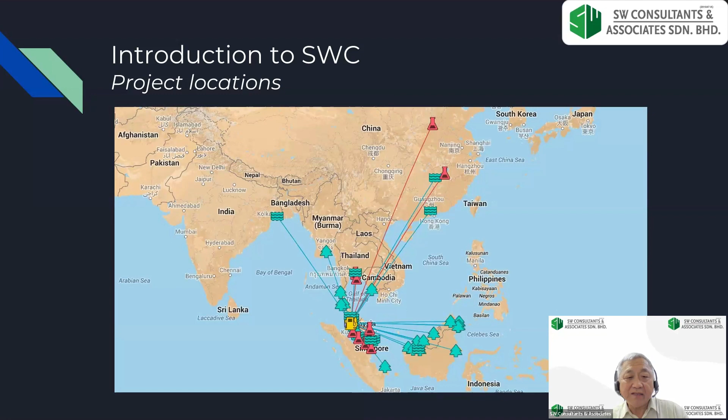Like in Calcutta, we did a quite big water treatment plant. The joint venture partner was Haldia Water Treatment Plant, joint venture with part of - I can't remember - Haldia is one of the bigger groups in India. They own the plant, but our working partner was under Ranhill Utilities.

Then there are some others that we have done. The so-called infamous project is the wastewater plant we did for Lynas Advanced Material in Gebeng, Kuantan. Till today they are still allowed to run it, so they still have to find a long-term solution for the solid waste disposal. We were looking after the liquid waste disposal, not so much the solid waste.

The radioactive part was handled by the client themselves. We were doing mostly the scheduled waste, the BOD, COD stuff.

Another project we did was the small palm oil mill in Ranau, Sabah. This was a project where the DOE imposed a condition of zero discharge. So in the end, we had to do the disposal using compost that consumed all the effluent.

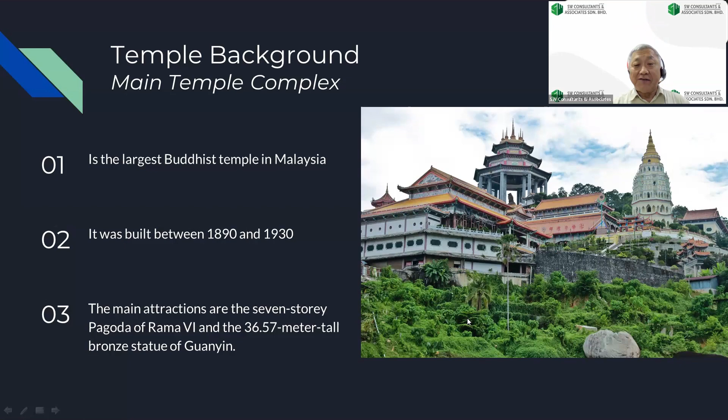It was in, I think, 2008 that Mr. Jimmy Koo of Jimmy Koo Consulting and Associates approached us to see whether we could take over the steel structure that is on the roof. He was the consultant for the superstructure, the concrete part of it, including I think the foundation and all that.

At that particular time, the base of the structure was completed. The column was coming up at the time, and I think the committee had approached him with two designs actually. The first design was in concrete, and it was way too heavy for the existing column and foundation to take.

So the committee went back again to China, and this time it was the School of Architecture in Zhejiang University, and they put up another design in steel. Even that came back too heavy - it was over 4,000 tons of steel on the roof, and I think Jimmy Koo felt that it was way too heavy for the column standing so high up.

So the committee actually at first talked to us to see whether we can do some kind of value engineering to reduce the total weight of the structure, but it will still be in steel rather than concrete. After studying it, we said okay, we can check through the design and make some proposal. But after we came back to them at the end of 2008, they said okay.

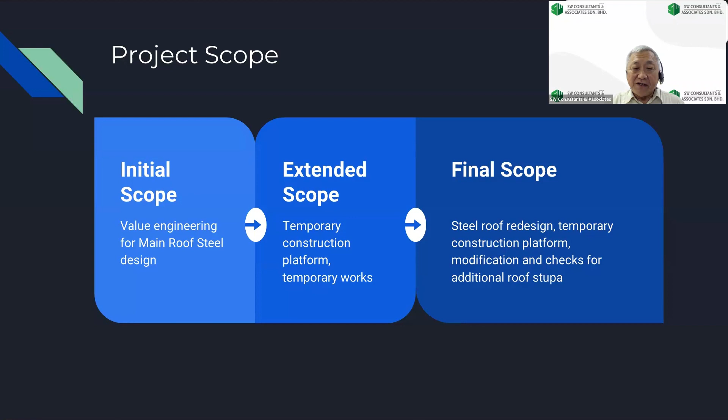Okay, let's have a look at the overall design of the thing, the design overview. As you can see, the structure is quite high. The Kuan Yin statue itself, plus the foot thing, is more than 100 feet high, and then there are various stages of the roof.

The roof itself - we had 16 columns, but they are all in a cascading form where not all the columns are supporting the roof. So there will be a stage where we have to do some transfer from the upper part of the roof to transmit the load right down to the column and then the base of the structure.

Overall, I think this drawing is the actual one that we started off with. But as you can see later, as we progressed, the design itself has changed, kept on changing.

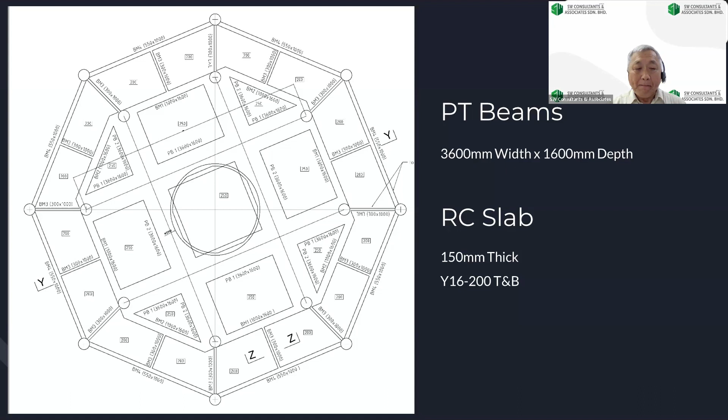Yeah, this is the post-tension beam. I think the post-tensioning was done by VSL. This is the walkway around the base of the pavilion.

Let's look at the challenges that we face. Bearing in mind that...

The RC structure was too heavy, so that's why we came in to change it into steel. But even changing it to steel, we still have to comply with the architecture that was previously determined, like the depth of the beam, the width of the beam. From the structural point of view, the beams themselves need not be that deep or big, but because we wanted the impact from the architectural point of view, we end up having such a big beam.

The beams are all prefabricated box girders in steel. And we have to imagine that some of the beams themselves are some 26 meters and weigh maybe 20-30 tons. But the lifting capacity of the crane we had on site was only 5 tons. So the biggest challenge was, how am I going to put up a 30-ton beam at that height when all I have is a 5-ton crane? I think that was one of the biggest challenges.

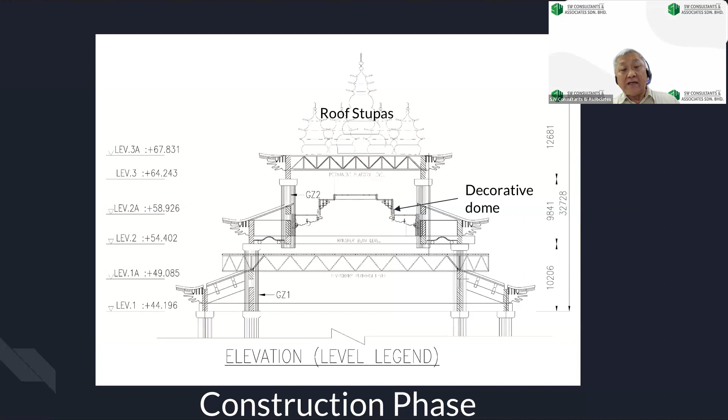So at the end, who is going to do that platform? So we ended up having to design the platform ourselves. I think later, under Lim Sin Chun, you will be able to see the detail that we did for the temporary platform. Okay, this is the temporary platform that allows us to reach upward to do the work above that level.

And the transfer beam - after the last column, the inner column only goes that far, and there's another level at the 54 to 64 level that needs to be seated upon, but there is no column underneath. So there's a transfer here - the introduction of another prefab box girder that will do the transfer from the higher level down to the foundation.

And then there's another part in which the permanent platform level is actually what we call the roof. The idea was how are we going to sit the stupa, the crown of the pavilion, which itself was quite heavy, weighing probably tens of tons. At the same time, we have to think about how to support the decorative dome that occurs below the roof.

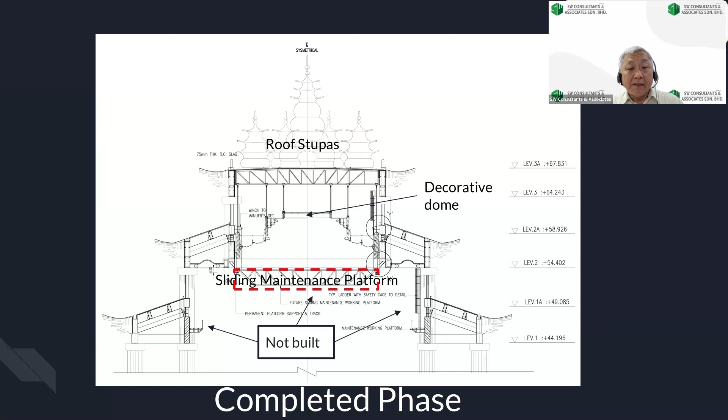Originally, one of the requests from the client was that during maintenance, eventually after the whole thing is completed, how are we going to do maintenance on the underside of the decorative dome? Basically repainting and maintenance, because the whole thing is in steel, so you need touch-up work throughout the lifespan of the structure.

So we came up with a sliding platform, but unfortunately this was never built, because in the end the chief abbot said it doesn't tie in with his architecture, and we were not allowed to install this sliding platform. Although the I-beams, the traveling girder, was installed, the platform itself was not installed due to his objection. He said it looks too much like a factory. So until today, this thing is not built.

So, the transfer beam—we have talked about the transfer beam. Permanent platform, okay. That's a plan view of the pavilion. We have the outer ring and then the inner ring. The inner ring is where it's supported on the transfer beam.

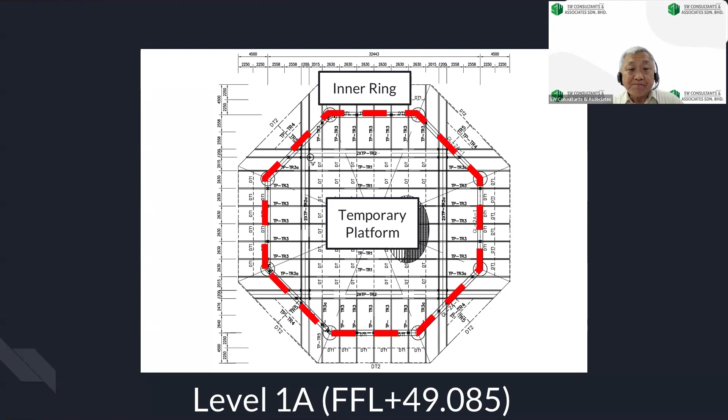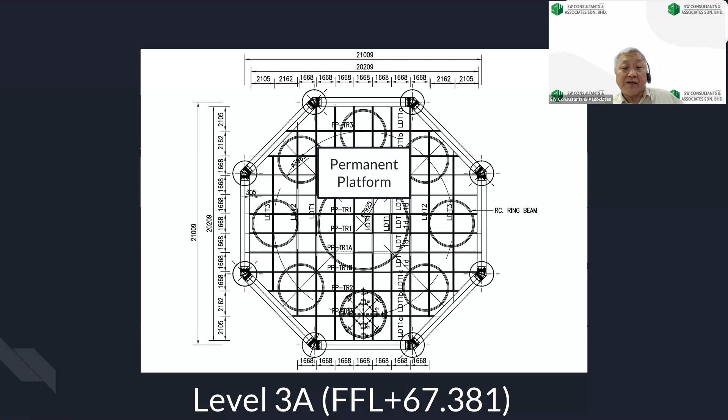The decorative dome, and then the small circle and the big circle is the final stupa that is representative of the temple that you see today, the symbol of Buddhism.

Okay, that's it. But now we will go through the 3D—I'll pass that representation to Engineer Lim Sing Chun to present it to you.

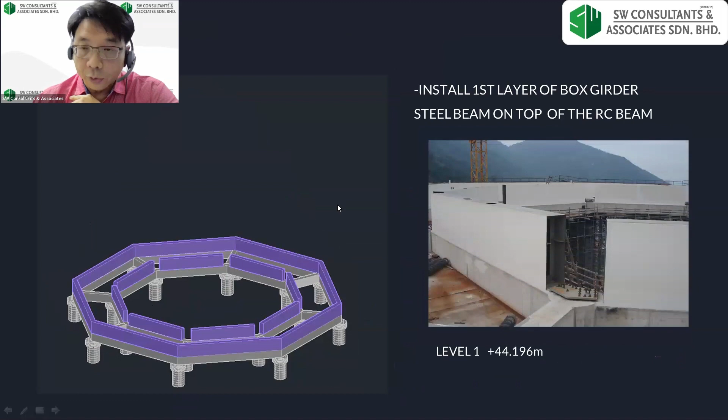I will go through the sequence of how the steel structural elements are installed step by step. This is the completed RC beam level, where the steel structural will start from. The first element to be installed is the box girder beam. All the steel beams will install on top of the RC beam as shown. This is another picture showing the builder installing the steel beam segmentally on top of the RC perimeter.

Now you may have a question: why do we need to stack a steel beam on top of the RC beam in the same span? In fact, the RC beam itself is already 1.2 meter deep, and the steel beam itself is 2.4 meter deep. The answer is to facilitate the installation work of the decorative cornice and dragon beard, because all the decorative features, as mentioned, are made from steel, and we just directly weld those decorative features to the steel beam.

The green elements shown are the dragon beard, to be installed at every corner of the beam. The light green elements shown are the decorative cornice. This picture shows the decorative cornice welded to the steel beam. This is another picture showing the dragon beard and decorative cornice completed in one span. This is a closer view, from which we can see the surface of the steel beam fully covered by the decorative features.

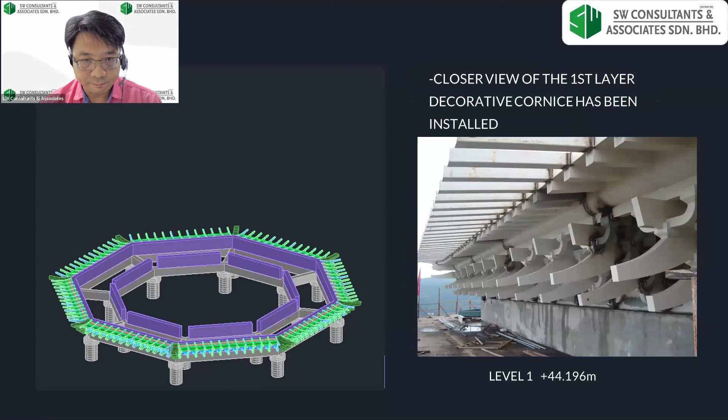Once the decorative features have been installed, subsequently artists from China will start painting the decorative cornice, because the painting work will take a few months to complete. In the next section, part 2, we will show the completed art painting work.

The next element to install is the prefabricated steel column. This is a cross-section view of the prefabricated columns. The reason we custom-made the column is mainly for ease of connecting the beam to the column at a 135-degree angle in plan view. This picture shows the sequence of the builder installing the column to the base plate.

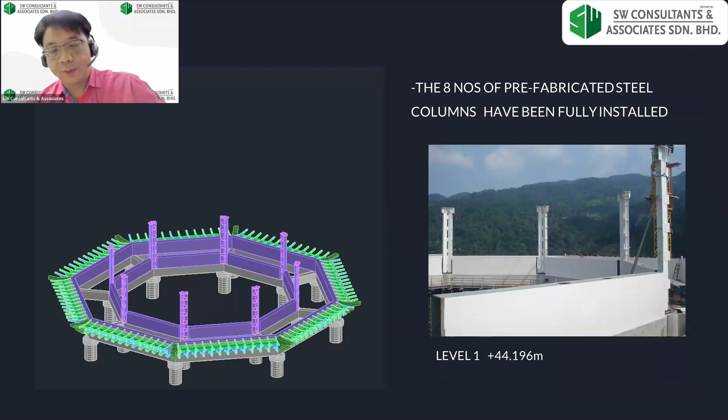When 8 columns have been installed, the following element to fit in is the rafter, between the column and the external perimeter beam, as shown.

The subsequent element to install is the column tie beam, shown in red color. This is another picture showing the builder installing the column tie beam.

The purlin, shown in magenta color, is the next element to install onto the rafter. This is a closer view of the purlin that has been installed to the rafter, showing the connection detail of the purlin onto the rafter.

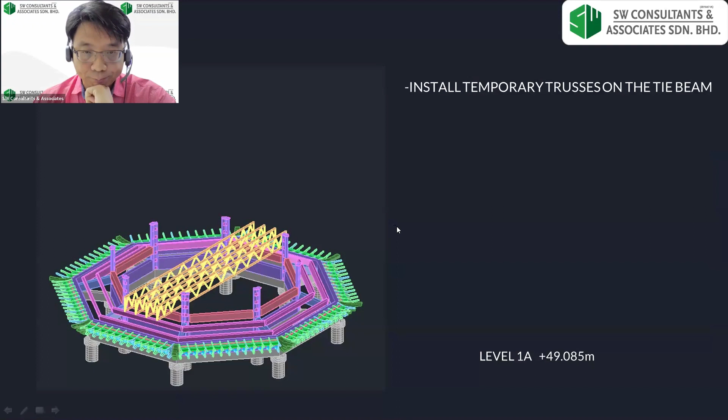After that, the next major element to install is the temporary truss onto the tie beam. This picture shows the builder installing the secondary truss to the main truss. This is another view of the secondary truss after installation.

This model shows that when all the temporary trusses are installed, they will cover about 40 meters by 40 meters. This is a bottom view of the temporary trusses.

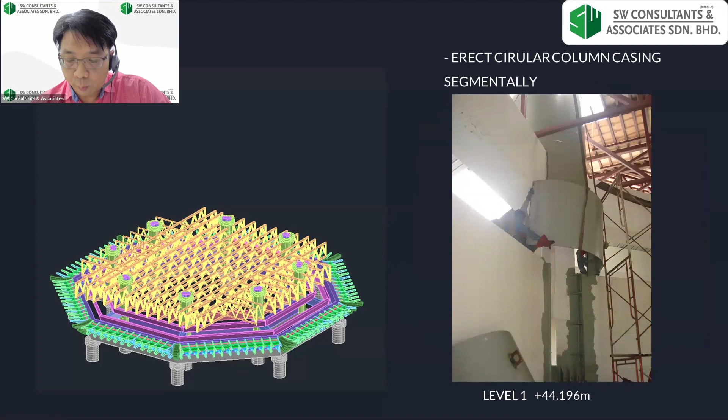During the installation of the trusses, the builder also has to erect the circular column casing segmentally, because the original column design is a circular column of 2.1 meter diameter with 20 mm thickness. Since we modified it to a prefab column, we need to cover it back with 4 mm thick circular casing to retain the original outlook.

This picture shows the circular casing has been completed. This is an internal view showing how the casing supports the prefab column.

When all the temporary trusses have been fully installed, the subsequent step is to install the hollow section floor joist on top, followed by laying the timber plank. This forms the temporary working platform for the builders.

This temporary platform is a significant structural element for this project. Without this platform, we are unable to proceed with the installation work for the following level. This is mainly due to the limitation of the tower crane, which has only 5 tons maximum lifting capacity. For elements exceeding 5 tons, it has to be broken down into a few pieces, lifted up to this platform to be assembled back. Once done, we are able to continue with the installation work.

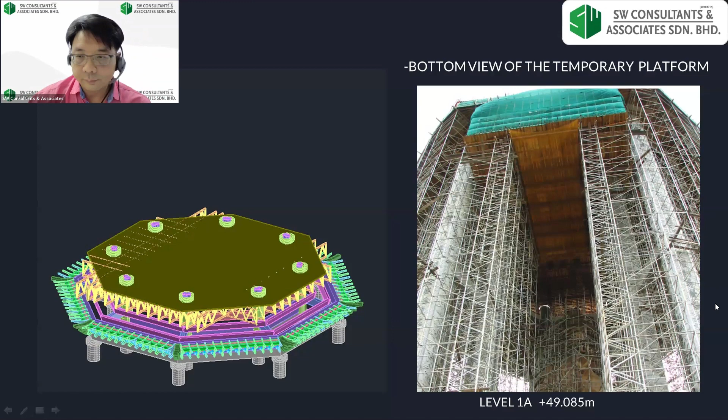Furthermore, based on the site situation, the scaffolding was unable to erect in the middle of the Kuan Yin statues. Hence, the temporary truss system is the best option for this project.

The next element installed is the second layer of box girder on top of the prefab column. There are 8 perimeter box girders to be installed in the second layer.

This video shows the second layer of box girder has been completed. Now they are starting to install the transfer beam.

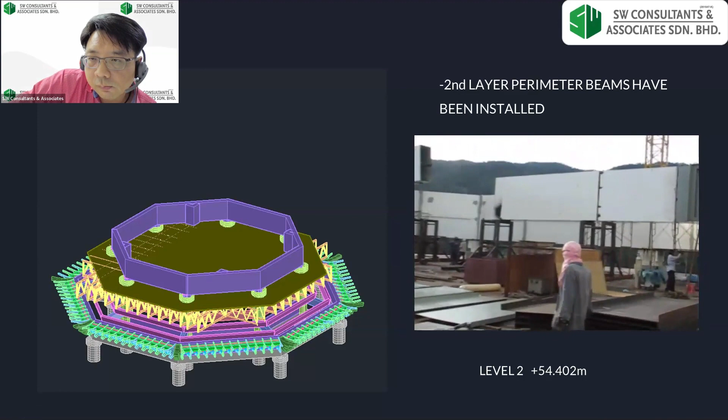The transfer beam is shown in pink color in this model, which is the next element to be installed.

This video shows the builder installing the transfer beam, jointed in 4 segments. From this video, we can also see that all the workers are working on the temporary working platform as mentioned just now.

During the installation of the transfer beam, at the same time they are starting to install the decorative cornice and the dragon beard on the second layer box girder beam.

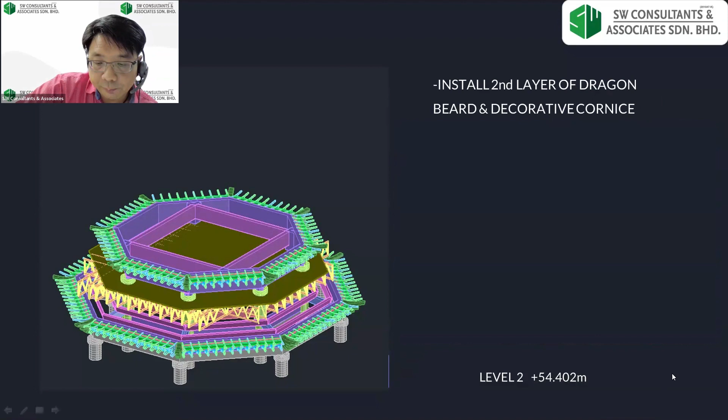The next element to install is the second layer of prefab column on the transfer beam.

After this, the following step is to install the rafter, which is the same procedure as level 1.

The next element to install is the tie beam and the purlins. The procedure is also the same as level 1.

For all the second layer of prefab columns, also required to be covered by the circular casing as well. From this picture, we can see that the right side casing has been completed and the left side column has left up the bottom segment to be installed.

The next interesting element to be installed is to assemble the decorative dome, or Chao Jing. The decorative dome is the prime decorative feature for this project. This picture shows the builder assembling 2 segments of the dome on the temporary working platform.

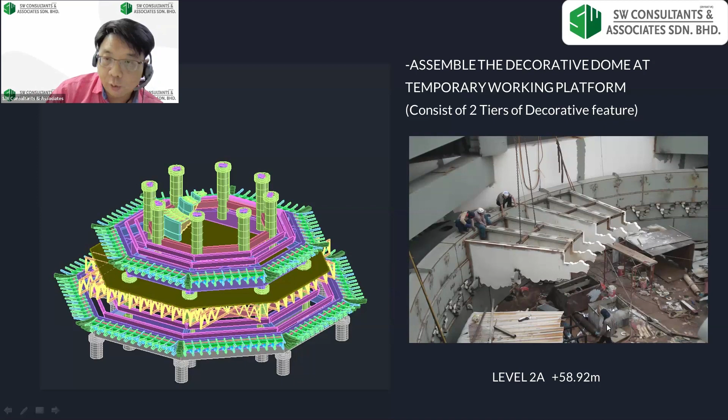Generally, the dome consists of 2 tiers of decorative features. The lower tier has 16 segments and the upper tier has 12 segments. This picture shows the builder assembling the 3rd segment of the lower tier.

This is a closer view showing the two tiers of the decorative dome, or Chaojing, that have been installed. Once the decorative dome has been assembled, the top view will look like this. This photo shows the worker covering the gap with the aluminum sheet.

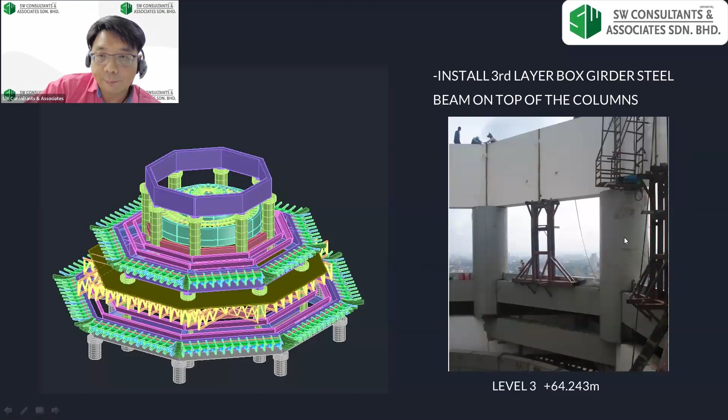The next element installed is the third layer of box girder onto the second layer of prefab columns. Once complete, the following step is to install the permanent truss to the steel beam.

This picture shows the permanent truss that has been fully installed. The permanent truss is another essential structural element. The truss is not only designed to support the 9 stupas on top, but also acts as a support system to hang the decorative dome below it.

The next step is to raise the decorative dome to the designated level and hang it onto this permanent truss with ties. This is a different view of the decorative dome being hung to the permanent truss. These trusses have at least 3 or 6 ties to hang the decorative dome.

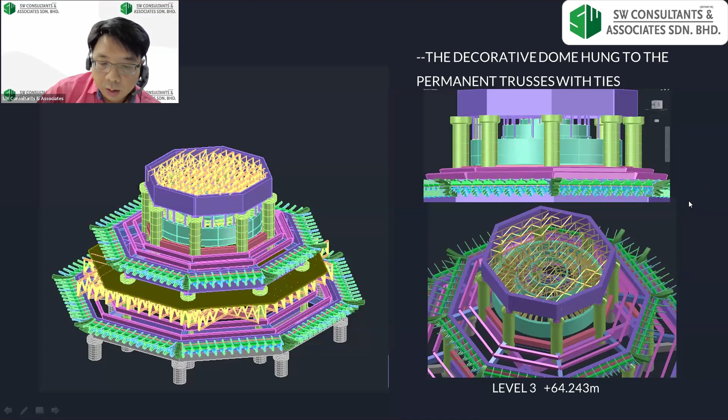This is the bottom view of the decorative dome. The picture shown here is the actual look of the decorative dome in the night scene.

The next elements to fit in are the decorative cornice and the dragon beard, welded to the third layer of steel beam. At the same time, they are also concreting the top floor.

The last element to be installed here is the 9 stupas. This picture shows the builder erecting the base of the main mini stupas. This photo shows 3 mini stupas that have been completed, and they are also starting to erect the base of the main stupas.

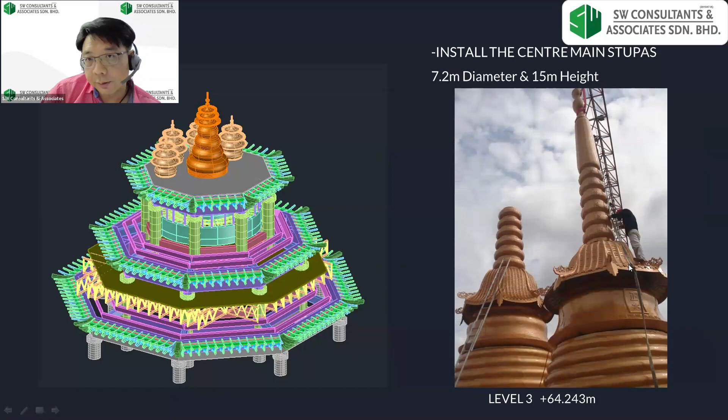The main stupa is double the size of the mini stupas. It is 7.2 meters in diameter and 15 meters in height. This photo shows all the stupas; one has been completed.

After this, the next step is to cover the 3 layers of roof. All roofs are designed as double roof, which is a lightweight concrete slab beneath it with roof tiles stacked on top.

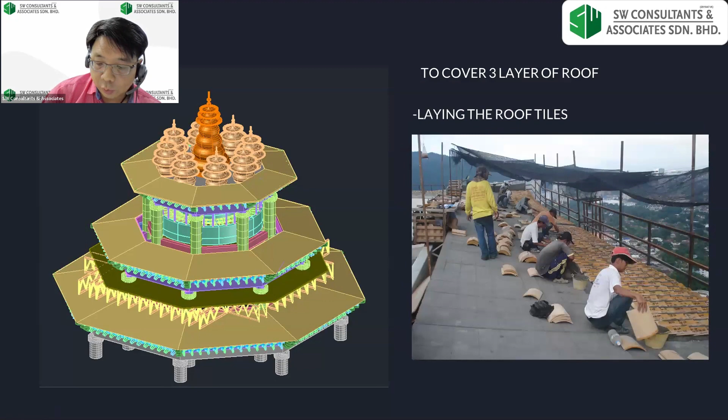This photo shows the builder preparing the slab soffit with nominal reinforcement. Then they start concreting the roof slab. After that, they start laying the roof tiles on top. This is the picture showing the completed roof work.

The final step is to dismantle the temporary working platform. All the temporary truss is to be dismantled and removed away. Once the temporary truss is fully removed, the whole steel structure has been completed.

The Guan Yin Statue Official Opening Ceremony was held in December 2009. This project was considered completed on time.

However, after the event of the ceremony, there was some extension work carried out because the client felt that the present stupa's height was not visible and also not in good proportion. Hence, all the stupas needed to be raised up by 3.5 meters.

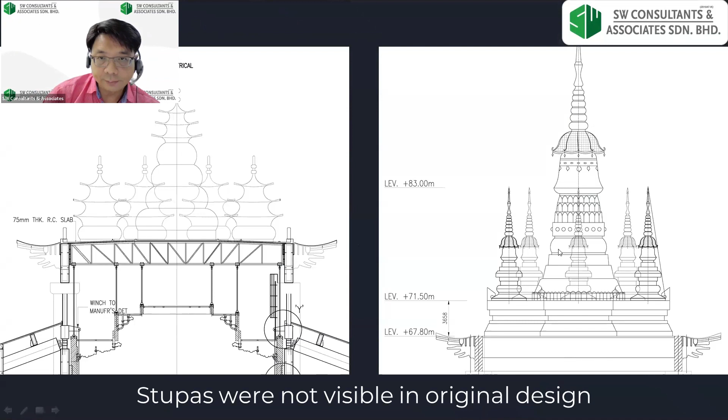From this drawing, you can see the left side is the original build and the right side is the modification. This is the raised up platform, 3.6 meters high.

Those are the drawings showing the original design, and this is the modification of the stupa's layout, including the tie-back truss at the corner. This is the section of the perimeter staging and also the tie-back truss. This is a modified base frame for all the stupas.

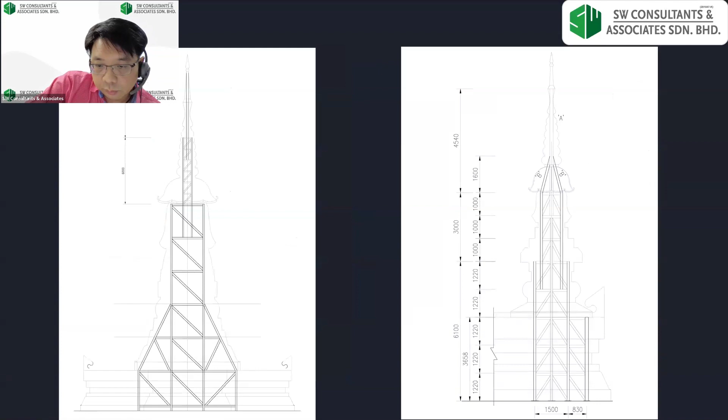This is the end of my slide. Before I end my presentation, I will run through the slides again very quickly to show how the structural elements build up in the 3D modeling.

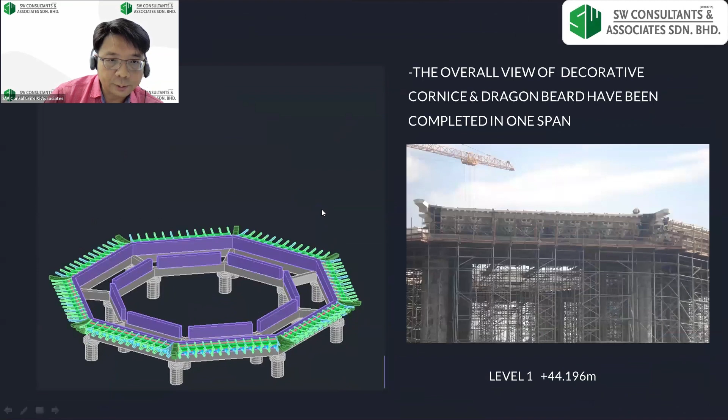Look at the 3D model showing the sequence of how the structural elements build up: from the temporary truss, platform, box girder, transfer beam, second layer of prefab column, casing, decorative dome, third layer of truss, then third layer of beam and truss, tie, and stupas.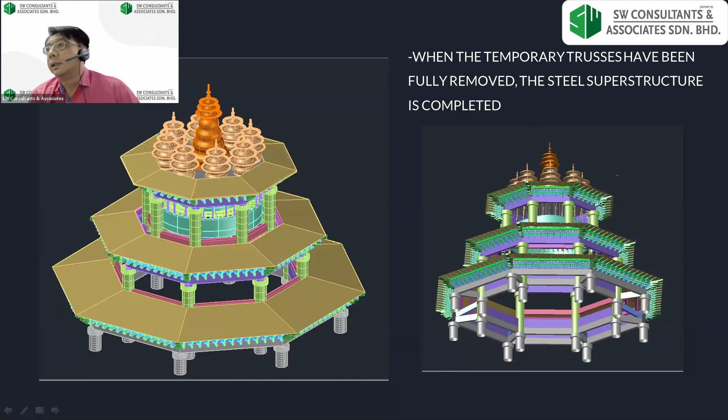Okay, that's all. Or you want to take it? Okay, there's a question here. Right.

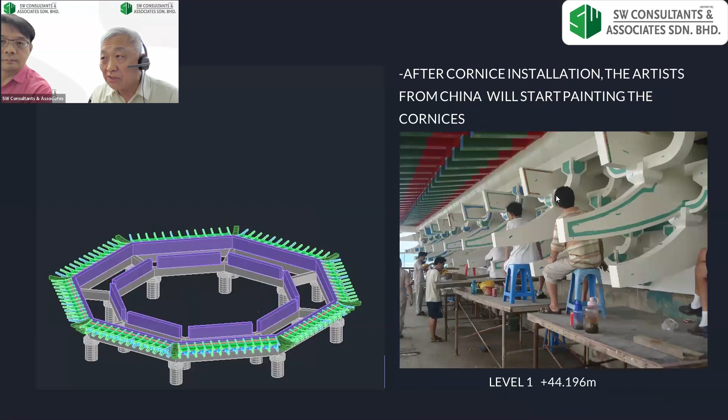This one I'm talking about, the hold down. Yes, oh, you are talking about the column. Okay, column, yeah, it's not the beam, this is a column. This column, you can see some of the hold down plates coming out of the concrete beam, right? That is installed during the concreting of the RC beam. The reason why this plate is installed first and not attached to the column is because it actually exceeded our 5 tons.

Our crane can only lift 5 tons, and this base plate we are using is about 25mm thick. They are quite heavy, over the 5 ton limit, so we decided it should be installed separately. We lift the base plate up, bolt it down to the hold-down bolt, and only later do we lift the prefabricated column and install and weld it on site onto the base plate. Is that answering your question?

Okay, so all this is prefabricated in the factory and assembled at the site piece by piece. Using steel columns and steel plate instead of concrete is to reduce the weight, isn't it?

Yeah, using steel was to reduce weight from the original design, which was much heavier. There were two options originally proposed in concrete, and the first version in steel was done by Zhejiang University, weighing about 4,000 over tons — that's the overall weight of the roof.

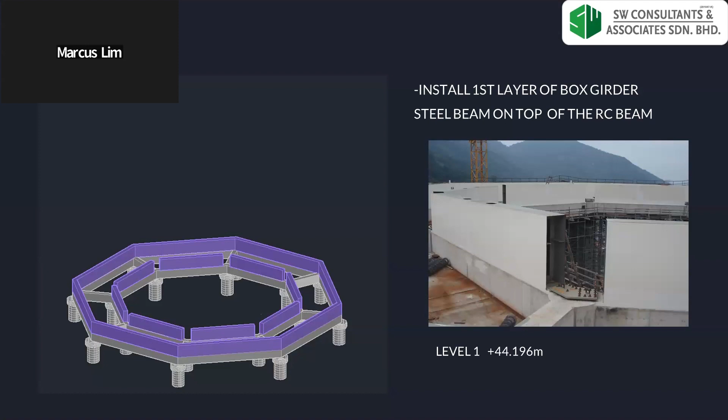If you are using a standard section, there is no section of this size. Even if we used an I section, it would have to be a prefabricated I section. But I think the main reason box girder was used is that when we went there, people had already decided to use box girder. But I can see one of the main reasons is to comply with the architectural design — when we welded all the decorative cornices, the dragon beard, and all that, it needed that kind of height to attach all these patterns. So structurally you could use any section, but architecturally the box girder seems able to fit all that. Also, since most decorative features are welded on one side, there's a lot of torsion involved, and the box girder is very good in terms of torsional rigidity. So after we fixed it, there is hardly any deformation because of the big size and big torsional capacity of the box girder. I hope that answers your question.

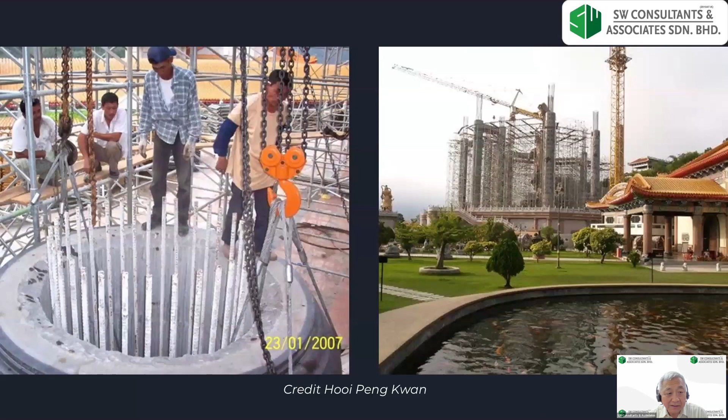This is the masonry casing used for the 16 columns. I think they all came from Guangdong, China. This shows how they erect the casing first with the reinforced concrete center. You see each ring is stacked on top of each other. They're all shipped in from China.

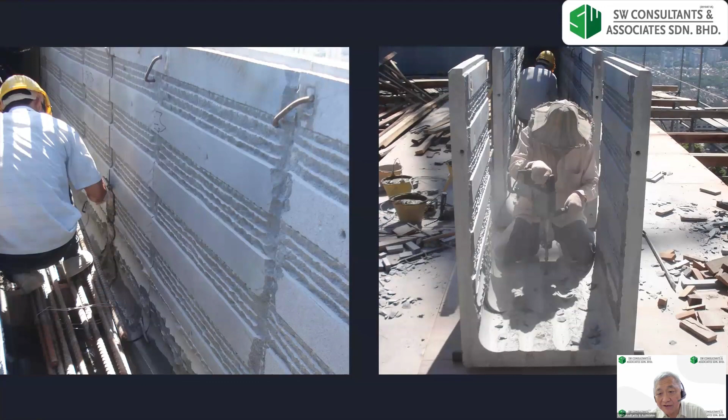This is the casing for the rectangular tie beam that you see at the pavilion now. Quite artistic work—they can carve a trench out of a solid piece of rock. That's where they put the rebar inside the casing. You can see more of the same.

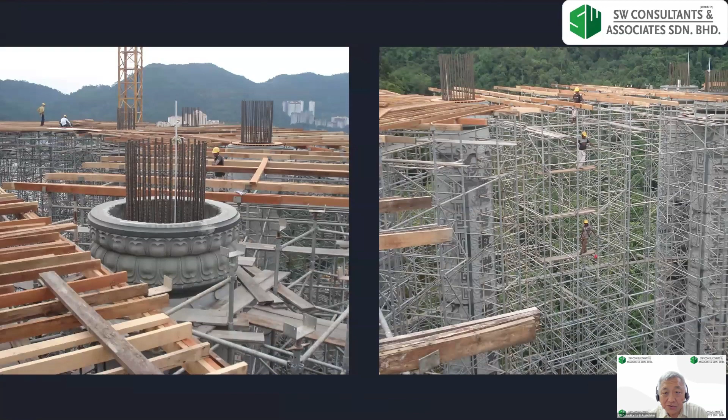The view from afar. They have probably reached level 1, where they're going to install the RC beam. This is the formwork for the RC beam. It's quite heavy because it's quite long, almost 20 meters. You see the heavy scaffolding they use.

That's the name of the donor, I believe. Someone is saying $2 million per tiang.

This is the hold-down bolt that the previous engineer, Mr. Chow, had asked for. You can see the installation of the hold-down bolts with the base plate for the column. Two levels of beam being cast at the same time.

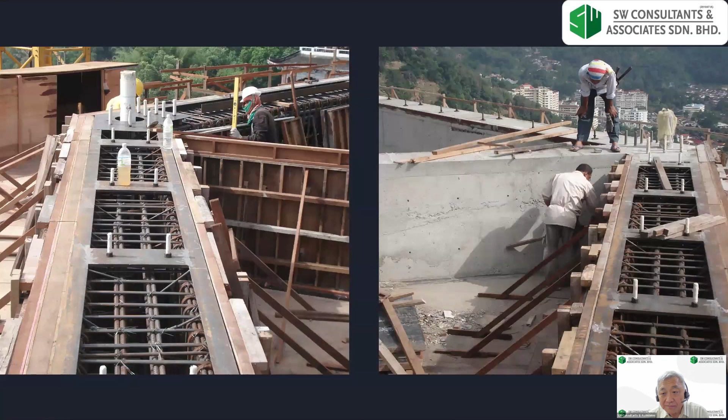This is the steel angle we installed to receive the prefabricated steel girder that's going to come on top of this. Steel is going to be much more accurate than concrete, so we need a leveling seat—that's why this angle is for the seating of the upcoming girder. This is after they have concreted it.

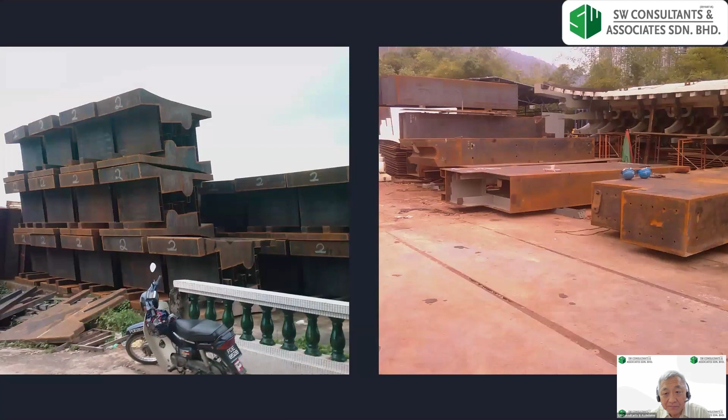This is the mock-up model. It was actually done in a very strange way. I asked Dato Go of Yuan Metal, who was leading the project for the temple, why he did the mock-up model, and he asked why I was asking that. He said he could do the load test—he'd put it all together and apply a lot of load on it, and if it didn't fall off, it passed. I think that's the layman way of doing the test, but I suppose it serves its purpose.

This is the beam that is going to sit on the RC beam, but this is just the mock-up unit. You can see more of the same—the fabrication of the decorative element.

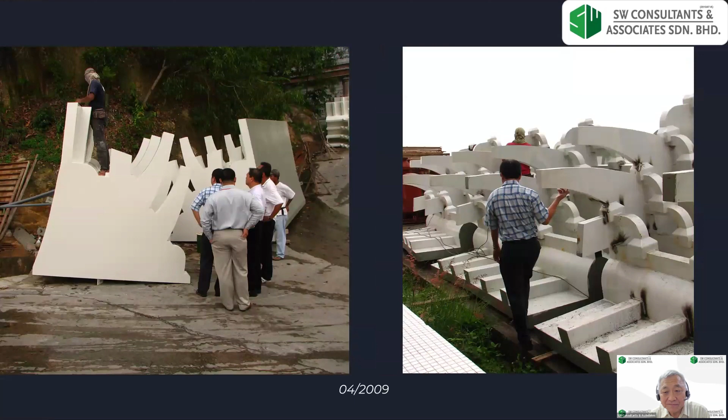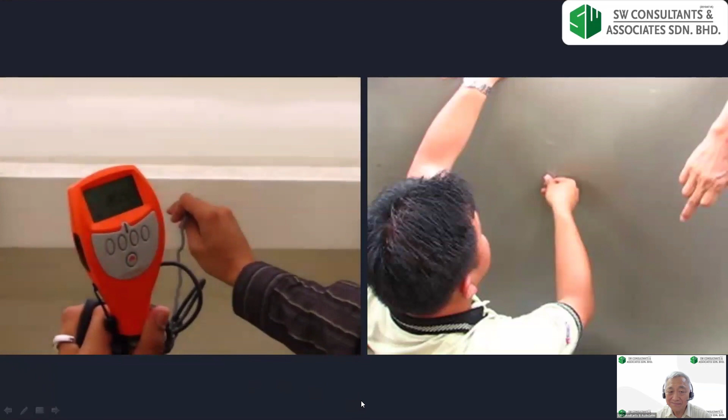Okay, there was some quality control on the paintwork that we have checked. This is the installation of the half joint thing, but at the end we cut it off and we welded it back.

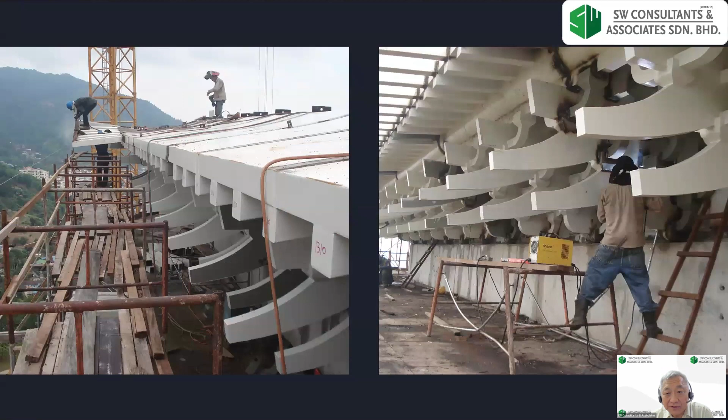This is the installation of the first layer dragon beard. This is the shot before the column is installed.

One thing interesting I want to bring up is that during the installation of this steel beam, we realized that the gap between the concrete and the steel, although we put the angle seating for the steel beam, this is due to the fact that during concreting, the scaffolding will go down because the concrete beam is very heavy, and the steel beam being lighter will be much more level than the concrete beam. So one of the interesting things is how are we going to close up the gap?

Somebody from Yuan Metal suggested that we should use the bolt holding the girder to the concrete beam and jack it. I said you will kill somebody inside there because the forces generated, trying to lift up the concrete beam with the steel beam, is impossible.

So in the end, we recommended that we can only use non-shrink grout to close up the gap. But at that height, 40 over meters above the ground, nobody will be able to see the gap. So that's what we did.

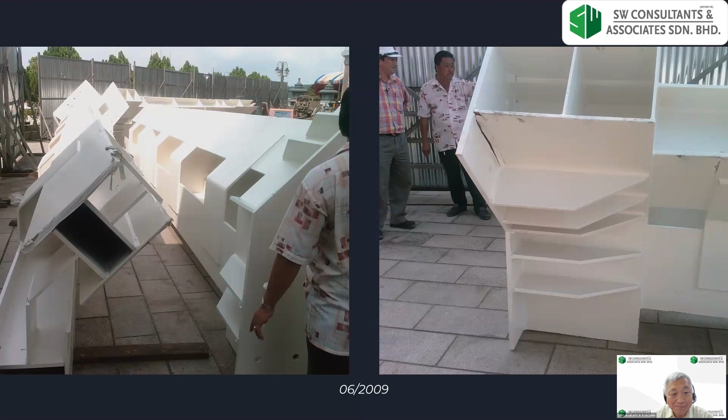You can see this is already put together and welded, the compound column that is going to go up. What you see on the right hand side here is actually the top of the column, not the bottom. There you are, delivered to the site, ready to be lifted up, minus the base plate.

One thing I need to mention is the second fabricator we engaged is much more experienced than the first one, because this guy claimed to have worked on the Langkawi Sky Bridge before, so he used to work at very great heights, with very little surrounding support. So he's a very good fabricator.

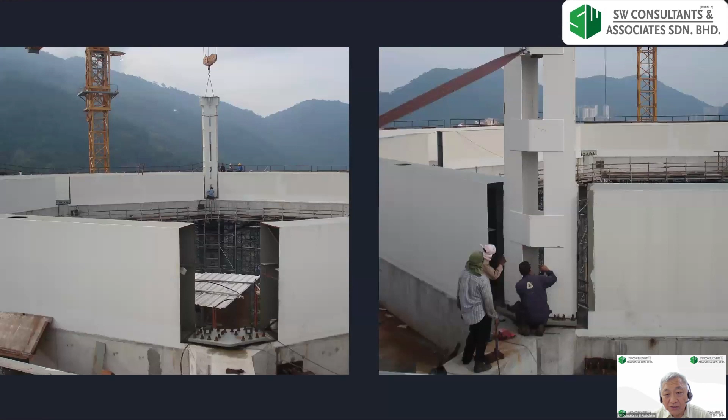On the way up, positioning onto the base plate that is already installed. There you are, they are trying to position it. We need to position it at the correct angle and the right orientation, because otherwise the adjoining beam will not join properly, so they need to be careful. One advantage of welding the base plate later is that we can actually do some fine tuning.

Yeah, we're welding it back onto the base plate. There you are.

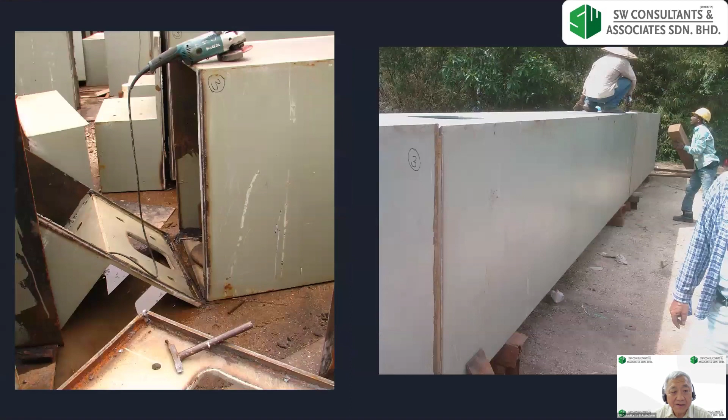This is the area where we cut off the half joint, because half joint just doesn't work. As you can see, when they put it together, there's still a gap there, and the beam will not be level or flat. So we cut it off and then joined it back using a vertical joint rather than a half joint, all by welding and not by half joint.

I think one of the reasons the first consultant used a half joint is to reduce weight, but we used another method. So we cut it off, welded it up on the side, so that we also don't exceed the 5 tons, but we jointed it at the top, since we got an RC beam there, we can put it on top and join it, rather than trying to do a mechanical joint. That doesn't work.

We were trying to join it. You can see some manhole left on top of the first steel beam. This is to allow us to thread it through the hold-down bolt on top of the RC beam, and later also to grout it back, to close up the gap between the steel beam and the concrete beam.

This is the installation of the tie beam. Again, more fabrication work.

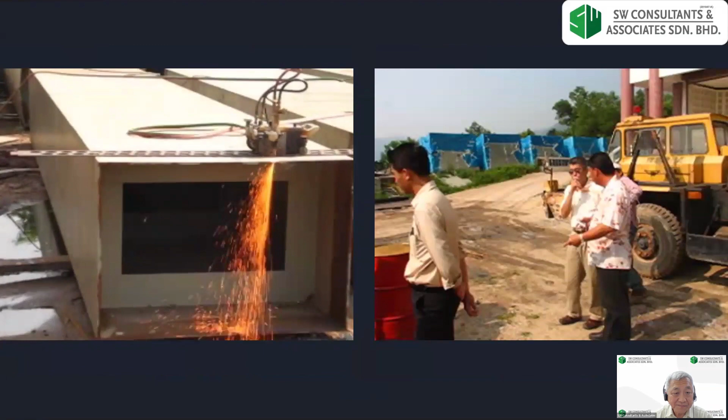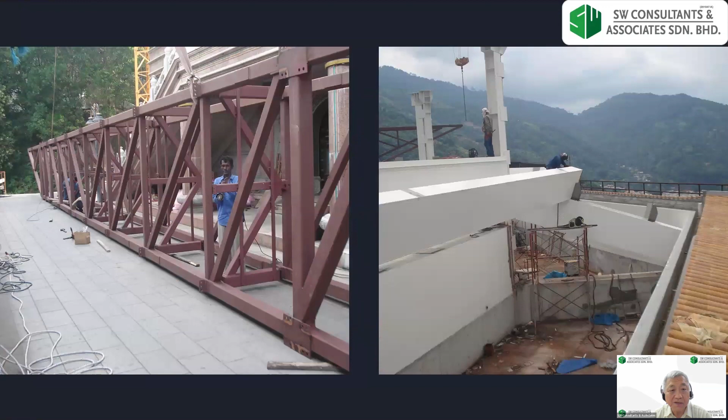This is the temporary truss, lifting up. It's much higher because the span is about 40 meters, so it's quite a big span.

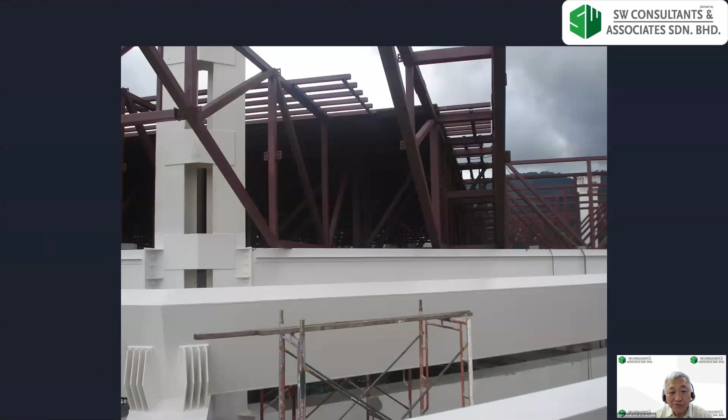You can see everything is quite big, though if you look from the bottom it doesn't look so big. This is the casing that we managed to reduce from a 50mm thick plate to a 4mm thick plate - a big reduction. That's one of the methods we used to value engineer the whole thing and see where we could reduce the weight, so that it achieves the capacity of the existing supporting column.

Another method we used - remember the roof will have tiles on top - we felt there was no need to do structural grade concrete here. So we invented our own mix: concrete with polystyrene beads as the aggregate, because the purpose of this concrete was just to hold the tiles providing the waterproofing. At the bottom we already have the metal deck with reinforcement. So this is one way we managed to reduce the weight.

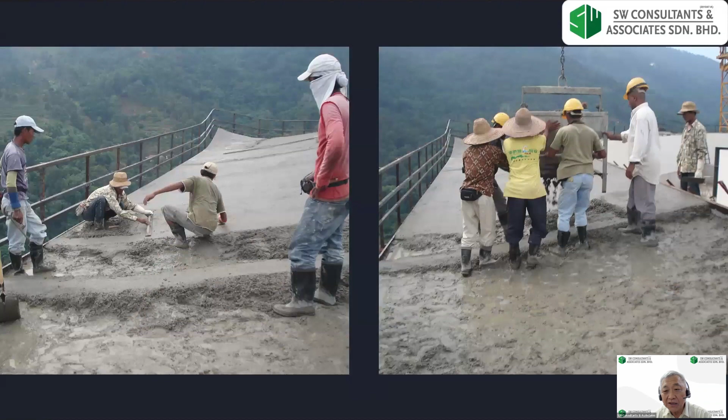Here you have the steel part, and then we put in the concrete part. The concrete used is our own design mix with the polystyrene, because this is how the Chinese in China do roofs - always concrete and then tile over.

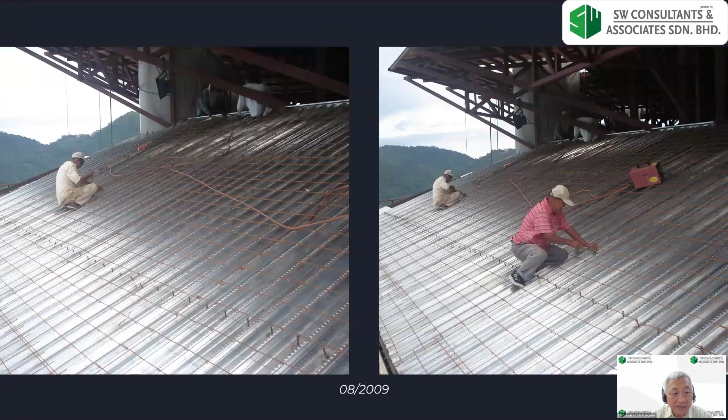This was for the temporary platform, I think. The Bondek - after the Bondek we have another layer of rebar, then concrete over again, then tile.

The installation of the decorative thing - at the same time, on the right here, you can see we are almost finished. Then the temple ordered another team of people to sandblast the Kuan Yin statue, to clean things up for the opening ceremony.

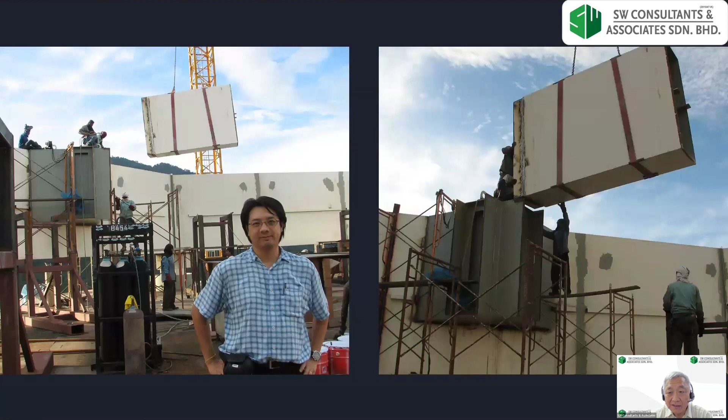This is the time for the casing. You see how we join it section by section - behind Nelson there's the stool. That's how we joined it. We have a stool on the temporary platform, and then we join it piece by piece. They weigh no more than 5 tons each, and each is jointed.

You see the stool that we use to level the two halves of the tie beam. On the right and left, these are the installation stools. This is the decorative dome, I think, and one thing from this picture is a bit interesting.

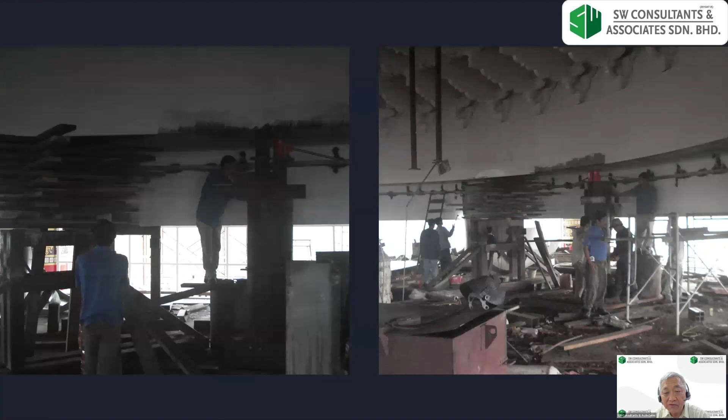The decorative dome weighs roughly 60 to 70 tons, but because it's fabricated and jointed on the temporary platform, we still had to go up roughly 2 meters plus 2 meters more before reaching the tie rod to the permanent platform. So how do you lift something that big, weighing 60 to 70 tons? We employed a series of jacks - every time we jack it up, we prop it at the bottom, then move the jack up again and jack it up, so we managed to move this decorative dome up in unison. Slowly we inch our way up by jacking from the base, and eventually some worker will be at the top to link the tie to the decorative dome.

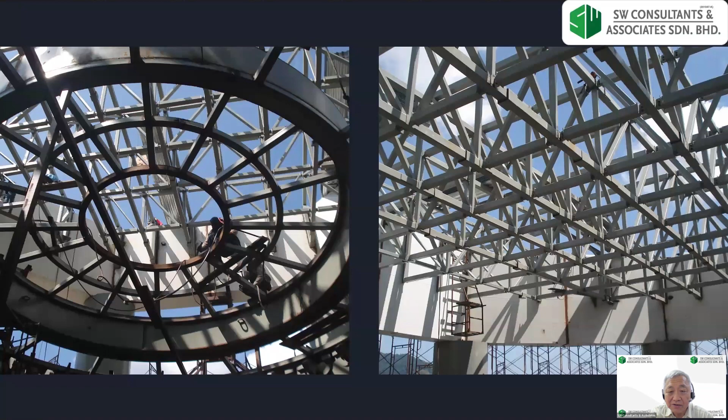You can see the fabrication is actually on the floor here, then we need to lift it up to hang it on the roof. More pictures of that - that truss is the permanent roof, and we need to jack it all up and tie it down again.

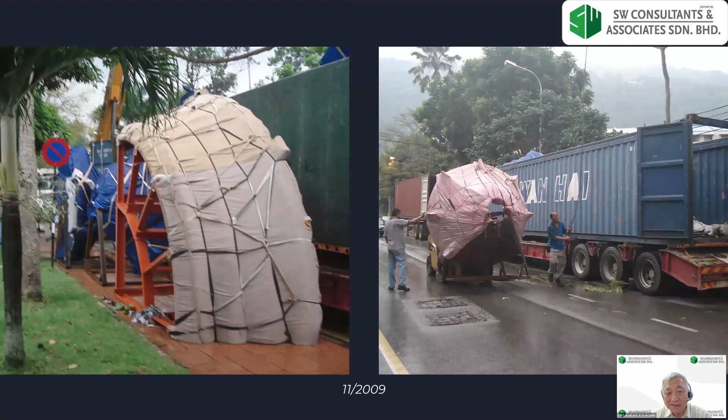You can see how massive it is. This is the stupa that was ordered from China, I think. It comes with its own frame.

Yeah. Oh, the transportation.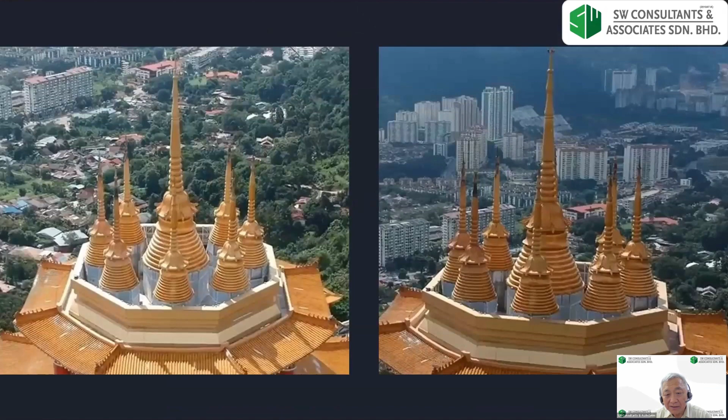This is the second phase where we raised the stupa to a higher level. This view is all lit up, I think during Chinese New Year. This is the view we took from the Air Itam Dam.

One interesting thing about this, even though there was so much work being installed at the top, there was no reported accident here. In fact, Marcus just reminded me, there was one case where a welder fell from the second tier onto the first tier, but he didn't drop down to the ground, and nothing happened to him. He's still okay, he didn't have to go to hospital.

Another interesting part was the toilet issue. Every time you want to go to the toilet, you have to walk down 40-50 meters of steps. So in the beginning, when I suggested we put a portable toilet on top, there was a big objection from the chief. He said, 'How can you do that? You can't put a toilet on top of Kuan Yin's head.' Then they said, what happens if somebody urinates from the top without permission? He said the last guy who did it, something happened to his genitals, so they will never do it again. I thought that was a funny story.

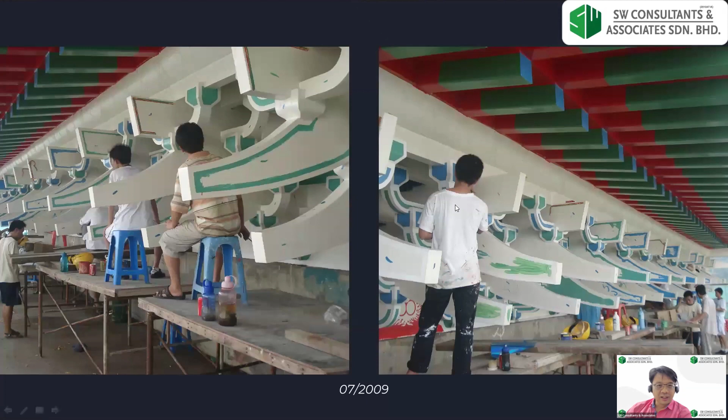Okay, this is the art painting work. This is the artist from China. They start painting on the box girder, this is the RC beam part, the top is the decorative corner. This part is also the RC beam. They start painting it with the facing. This is a completed view.

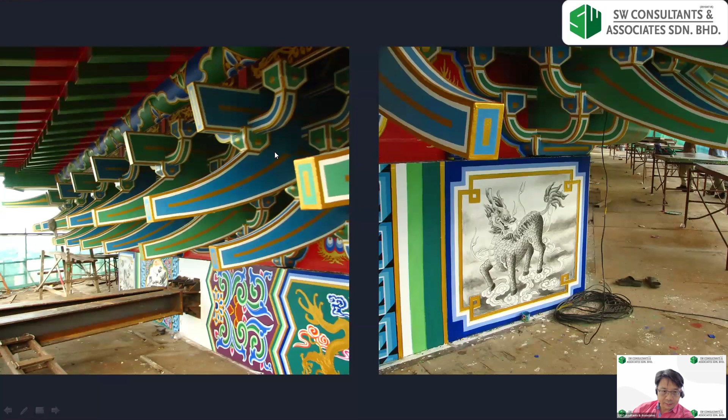This is a blow up. And this is another painting work. This is the location - just now what we've seen, the artwork is located here. And then this is from here. These are decorative corners.

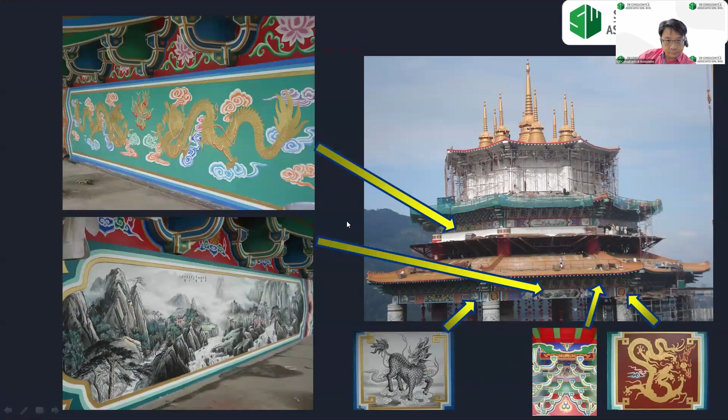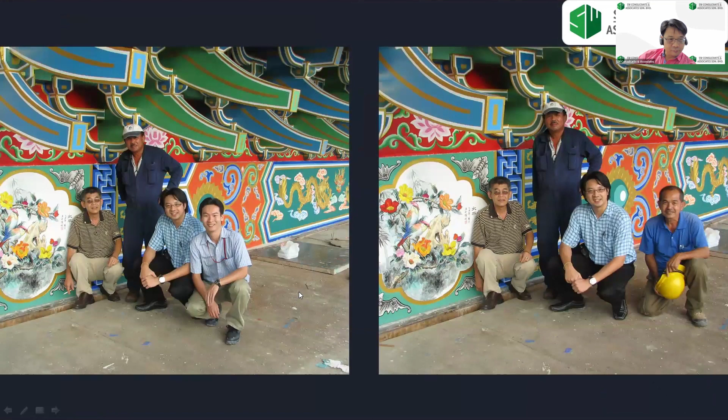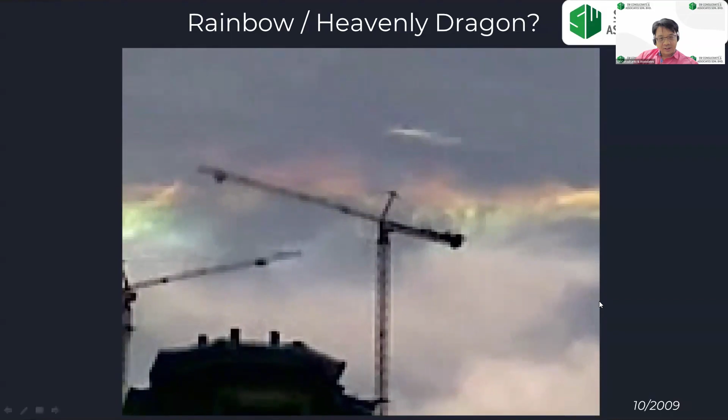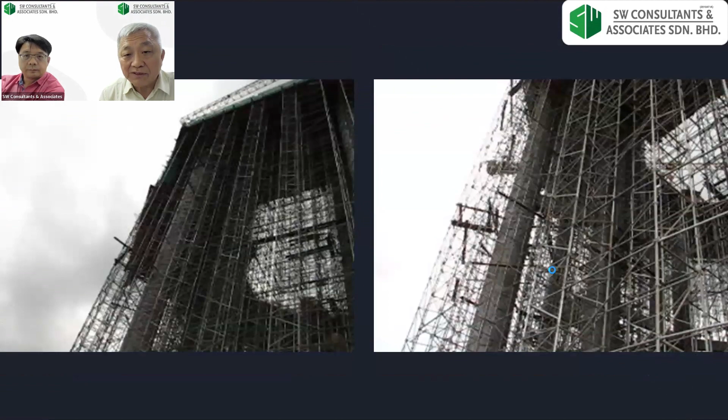If you mean the shear reinforcement, the ring - there is actually a ring inside, around the rebar, for the column. You can actually see the rebar. Let me show you, going back to the column.

The shear links, as structural engineers call them, are actually in place, and the masonry work actually acts like a formwork for the column. So there is a binder or ring around the rebar, but not around the casing itself.

That's why I earlier mentioned the crack caused by vibrated concrete, putting stress on the ring. That's what happened. But if there's no ring, it will look terrible - we can't have a ring around the casing, right? I hope I answered that question.